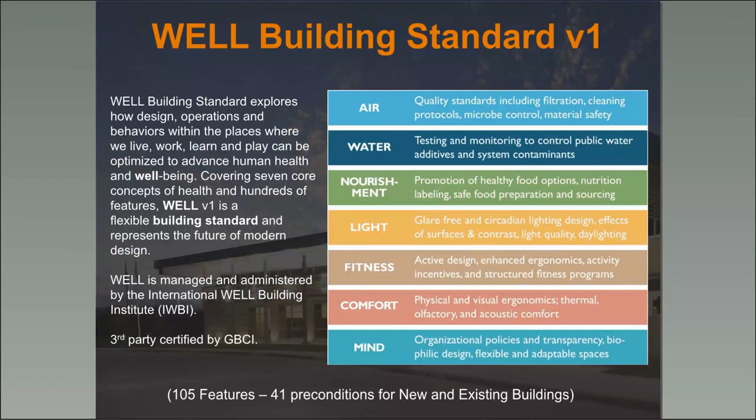The third-party survey that I talked about that we have been using is by the Center for the Built Environment. It's a University of California, Berkeley organization. They have an indoor environmental quality survey, IEQ survey, that is an industry standard. They have different surveys for different kinds of project types. So the one that we use for our study, in this case, was the one for the schools.

The interesting part is that we have been using this survey, the third-party survey, for the last 8 years, and WELL Building Standard actually defines a precondition for their standard is to use the CBE surveys for 3 years after occupancy. So they are also understanding how important it is to actually do a third-party user satisfaction survey rather than create your own surveys. So the survey categories that are included in this CBE survey are all the 10 that you see there, which all relate to human health and wellness and user satisfaction.

You can actually add 4 additional ones, which can be project specific. So we go to the facilities and we say, these are the ones that will be included, but what other 4 do you want to survey? So there have been times when people have told us, let's do low-flow toilets, let's do low-flow faucets. Someone even wanted to do sod as one of their survey categories, and we are able to include that. For us, what was also very important was to add daylight and views into our survey categories, and we paid some additional money to get that.

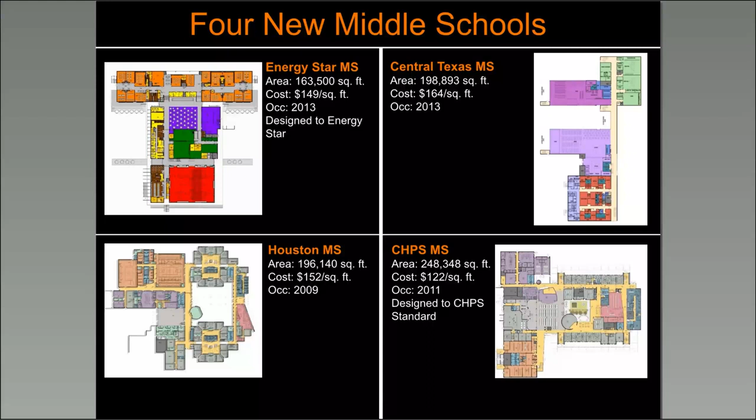These 4 middle schools are all similar in program scope, but they do differ a little bit in their square footages, from 163,000 square feet to 250,000 square feet. And they were built all the way from 2009 to 2013.

Before we get into the actual individual characteristics of the buildings we studied, we wanted to show you a little bit about how our analysis looks, and also the response rates. The Well Building Standard has a precondition of doing user surveys, with a criteria of a minimum 30% response rate. We were able to get more than that—we typically like to get more than even the one school that gave us 50%. We try to send as many reminders to the schools as possible to get higher percentages as we move through the survey process.

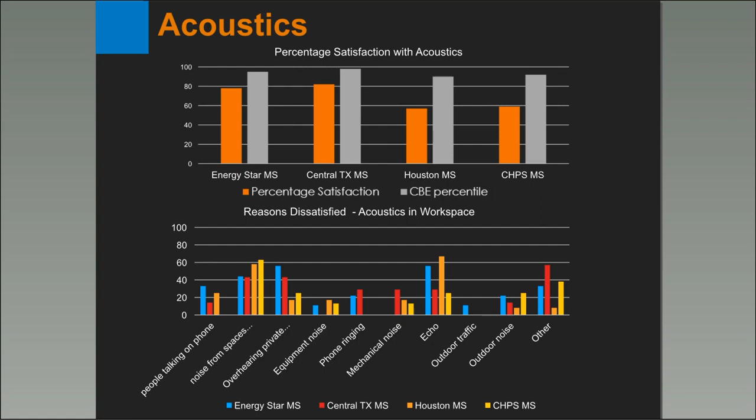Before going into the specific issues, I wanted to address 2 terms, to make sure we all have the same definition. A decibel is a unit we use to measure the intensity of a sound. That first chart graphically gives you a reference for varying decibel levels. I wanted to point out specific references for the 40 to 50 decibel range and the 80 decibel range. Moderate rain is about 40 decibels, a typical refrigerator is about 50 decibels, and the sound of a truck is about 80 decibels.

Sound transmission class, or STC, is a rating of how well a building partition attenuates sound. Things that affect how well a partition performs are its mass, its framing methods, and its air tightness. At an STC of 40, loud speech is audible through the partition but not understood. At 50, shouting is barely audible. In general, STC ratings between 40 and 50 are considered pretty good in the industry. But again, sometimes noise is subjective.

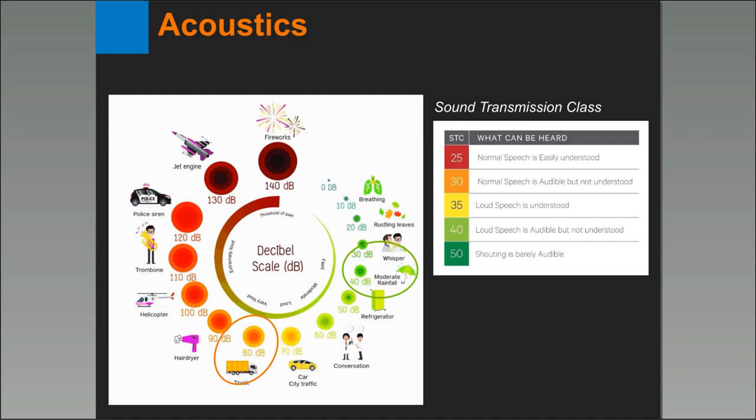So now we're going to look at the specific issues that the commenters commented on.

So one area in particular was with regards to foldable walls at classrooms. A quote from a user says, "We have foldable walls. We can often hear what's happening in the classroom next to us while teaching. And while the foldable wall helps create flexible spaces, if we can't provide adequate acoustic separation when the rooms are used separately, we really haven't given you flexibility."

And like I said before, we visited this school and took some decibel readings in a few of the classrooms. One room in particular was being used for small group instruction with our teacher, and the adjacent classroom was a full active classroom. In the small group classroom, the decibel reading through the partition was about 45 decibels. Per industry standards, anything over 40 is considered pretty good. But since one side of the wall was doing quiet work, it was still considered a distraction for some users.

So what can we do to allow this kind of flexibility for schools who want it and provide better acoustic separation for the various tasks that can happen in classrooms? Well, first we can specify higher STC rated partitions. We typically specify movable partitions with an STC rating of 54, but many times these get value engineered to a less rated wall. I think the ones at this school in particular were down at an STC 49.

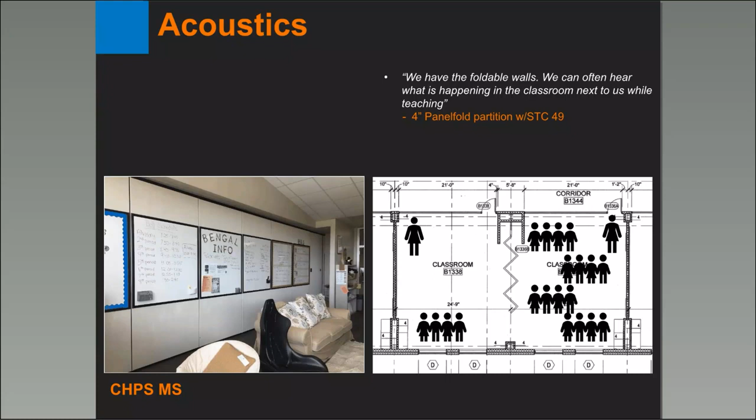So we need to make sure that everyone's in agreement that this is not one of those items we want to skimp on. Second, we need to make sure that the movable walls and the seals are maintained and that the users know how to correctly operate the walls. Because if the seals aren't employed properly, sound can leak through the cracks and reduce the effectiveness of the wall, and you'll get bleed over sound between the classrooms.

Another location identified by the users was surrounding the cafeteria. When we visited the school, we got to experience the dining space during lunchtime. We took an ambient noise reading for the cafeteria, which registered at about 80 decibels. If you remember back to the graph, that's about as loud as a truck.

So one way to address some of these issues is to provide additional separation between the quiet and instructional spaces and larger assembly spaces. But when that's not an option, providing a higher STC rated wall or even double walls, which has an airspace in it, is even better and very helpful. When you have doors that open up off of these spaces, you could also provide sound seals at those doors, or maybe even add a vestibule, which would help from that leakage from when doors are open.

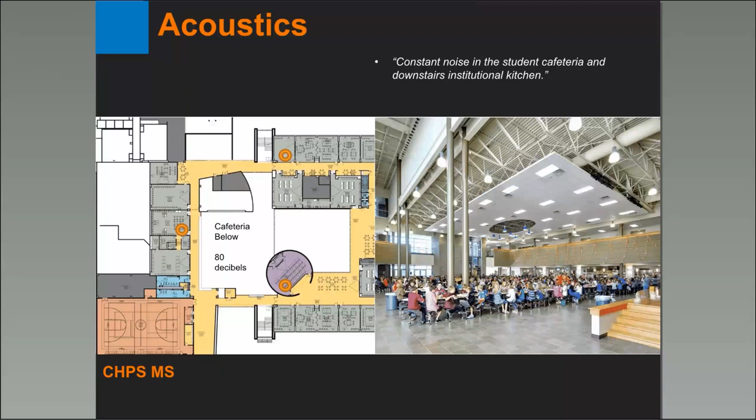So the Central Texas Middle School, they gave us quite a few comments in regard to the acoustics of their space. One quote says, "We hear the toilet flush every time someone uses it." And another one was, "We hear heels tapping down the hallways above us."

In talking with the design team, even with providing all walls to deck with sound insulation, they still experience issues such as flushing noise from the toilets. With this in mind, we really need to be reviewing adjacencies during design. If possible, it's best to locate bathrooms next to louder spaces, but when that's not really an option, you really need to provide additional sound separation to help mitigate that problem.

Again, those double walls with the airspace, and just looking at the different STC ratings and acoustical ratings of the different wall types and making sure you're picking the right one that will provide the best isolation between those two spaces.

The comment regarding the tapping and walking down the hallway is actually very informative, because we don't always think about the adjacency of spaces below or above the rooms. We're just really looking left and right, up and down, but the vertical adjacencies are very important too. The specific complaint was regarding the classroom over the library, which was underneath one of those entire wings. They could hear students moving chairs and desks, plus the tapping of heels down the long corridor, and it was distracting.

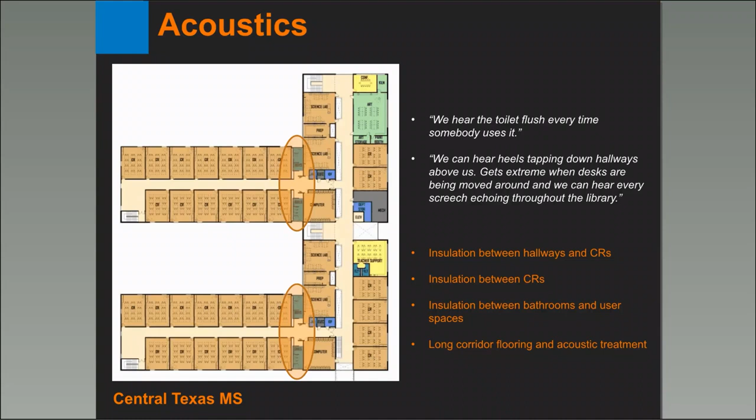So to sum up some architectural design considerations on this list: reverberation time increases background noise, so use hard surfaces and exposed structure with caution. Also consider the path of travel sound can take. All three of our examples benefit from those three considerations. If we really think about those during design, we can help mitigate some of that.

We didn't really cover mechanical noise issues, but in general, limited space for HVAC ductwork can increase air velocities and increase the noise from the ducts. And when comparing equipment noise data, you need to make sure you're comparing the same noise data from the same standards, so that you're really evaluating apples to apples.

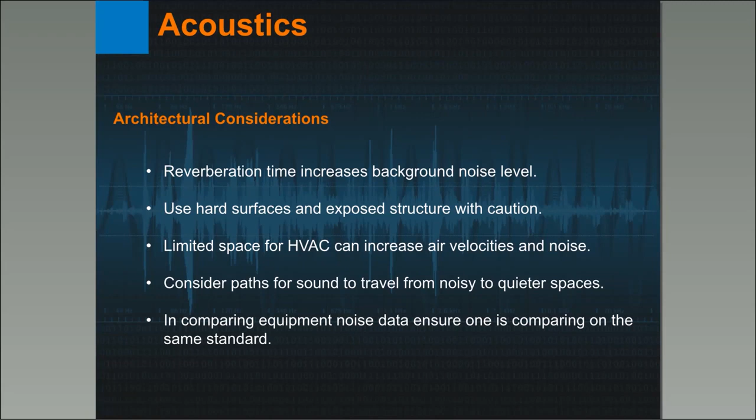Tying this back to the WELL building standard, acoustics is under the concept of comfort. The WELL building standard aims to mitigate unwanted indoor noise levels and reduce exterior noise intrusions to enhance learning, productivity, and social interaction. WELL has recognized acoustics as an important concept, and because of that it has set preconditions that must be met, such as limiting exterior noise intrusions to 50 dBA and limiting internally generated noise to a noise criteria of 35 in classrooms.

And I will turn it over to Shivani now.

Thanks, Christy. Great. So our next category that we are going to talk about is daylighting. And I know this first slide gives it away. Actually, just before I get on, I saw a question that popped up asking to please define POE, from Gloria.

Gloria, our slides 4, 5, and 6 do talk about it, and POE is post-occupancy evaluations. Sorry if the abbreviation wasn't clear, but we define post-occupancy evaluations as a quantitative and qualitative way, and that's why we're going through the qualitative aspect right now with user surveys, and we'll get to the quantitative aspect at the end of our presentation. We can probably talk about the second question, which is a bit more descriptive, at the end of the presentation, but please feel free to type in your questions as you see them.

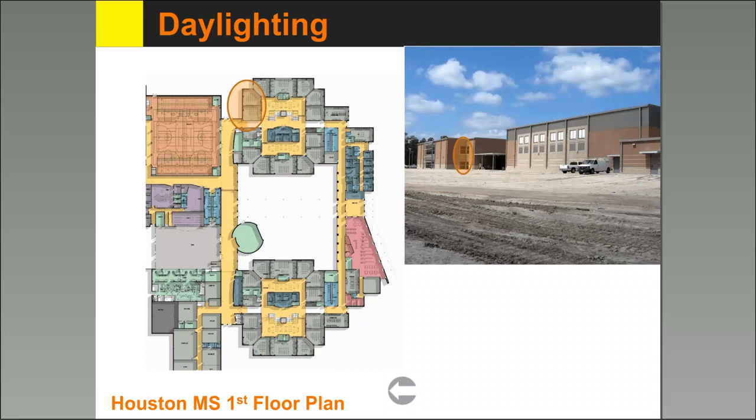So we looked at the Houston Middle School, and you can see from those images and the floor plans, the Houston Middle School, which had slightly higher user satisfaction than the CHPS Middle School, had those 2 punched windows at the corner of the classroom, and that was pretty typical in this school.

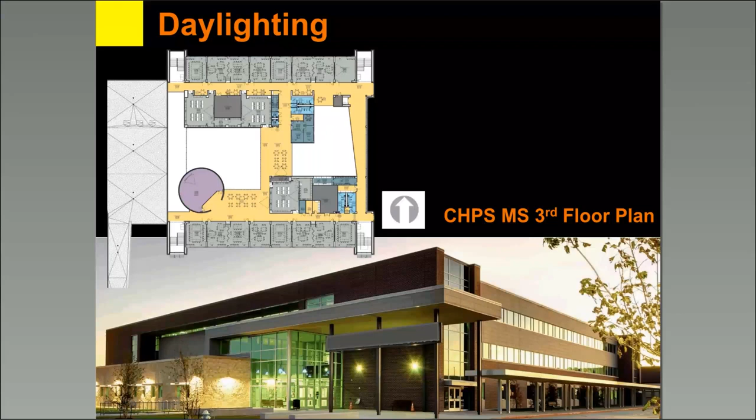But if you looked at our CHPS Middle School, this is truly one of our flagship schools, and it has wall-to-wall glazing. You are seeing the north side glazing right now, which is, those right side of the entrance is all classrooms, and they are wall-to-wall glazing on the second and third floor classrooms.

And then when we looked at the south side, it was really well-designed daylight harvesting system. You had light shelves, sunshades. There were sloping ceilings to get the daylight all the way in. But we did, again, get the comments about the glare being too harsh on the projection surfaces.

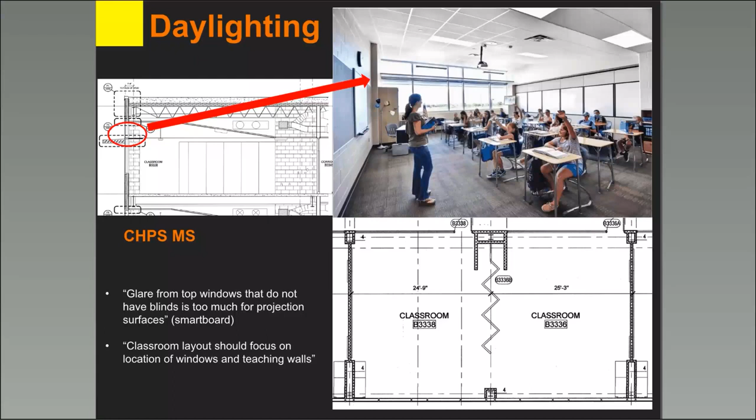So we remembered that and then we went actually and studied this building live. So we actually went and looked at it, just like Christy mentioned. This was one of the buildings that we went down and saw what was going on. And what was very disturbing for us was that they had gone back and added the blinds on top of the light shelves in the clerestory windows.

These blinds are completely inaccessible, so they're always down and always closed. But even then, you can see that the smart board was actually not visible to someone from this side of the room.

We also remembered that when we had done the elementary school studies, there was something similar that we had noticed. There was an old prototype school design which had 2 punched windows on one side of the classroom, but then a very well daylight harvested classroom, as you see on the new design pictures at the bottom.

But when we did our survey analysis, we saw that really the old prototype design actually had higher user satisfaction, as you see in that orange, as compared to the new design. And the new design actually did not do very well in the CBE average database as well. We were pretty low in that CBE average.

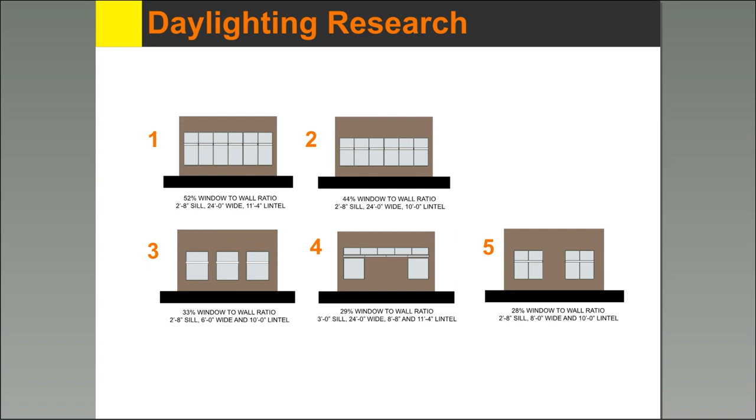that we see in classrooms to understand and ask ourselves the question, how does glazing size or configuration, sunshades or light shelves, and orientation of fenestration affect daylight quality and user comfort, heat gain and thermal comfort, and construction costs?

Daylight can no longer be just listed as the quantity of daylight. It is the daylight quality that we are looking at, and this research is just completed, and we got to learn a lot from it. But understanding that this research would have never come about if we hadn't done the POEs and seen what our users really want.

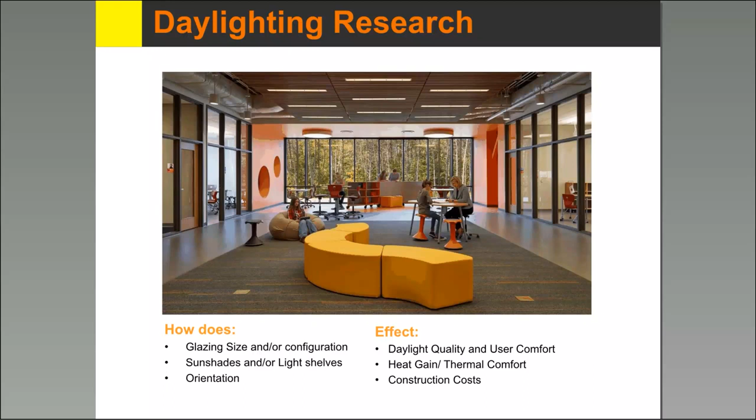But coming back to why we are seeing this difference too right now, and why we used to do daylight harvested buildings previously, is because lighting codes have changed. In previous years, daylight harvesting gave us back much higher returns because energy codes were not that stringent.

Now with IECC, almost all our buildings are 100% LED lighting, where the payback is not as high for daylight harvested classrooms. Projection technology definitely needs to be specified for the amount of bright light in the classrooms, and that can get quite expensive. In both those schools that you looked at, the technology that would have worked better with bright light was value engineered. So that's a tough thing.

Like Christy said, I think with value engineering, we have to remember the decisions we cannot skimp on. And then it's very important to have the right training. People that did not understand how the daylight sensors worked were indeed more dissatisfied because they thought the switches were just not functioning. And also, we got some comments back about motion sensors not functioning.

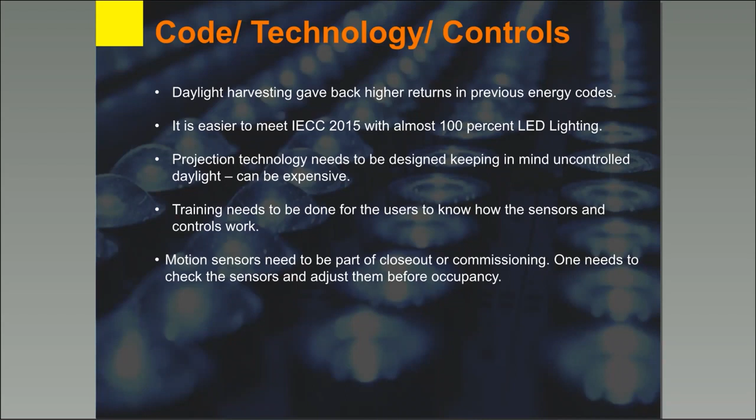And I think it's very important for us to have commissioning requirements and making sure that everything is functioning when it comes to these kind of sensors in order to get higher user satisfaction at the time we give our clients the completed project.

So tying daylighting back to WELL, it actually absolutely defines or understands that there is something that we have to also look at. I really like the quote right there: there are two kinds of light, the glow that illuminates and the glare that obscures. And in this case, that's literal. Even LEED version 4 has actually really addressed glare to a very large extent.

And the preconditions that WELL has defined, because of how important daylight quality is to user comfort and health, talk about visual acuity, which is all about visual balance. And then it talks about solar glare control and electric glare control. And we have to meet those preconditions to be WELL certified. I will hand over back to Christy to talk about our next analysis.

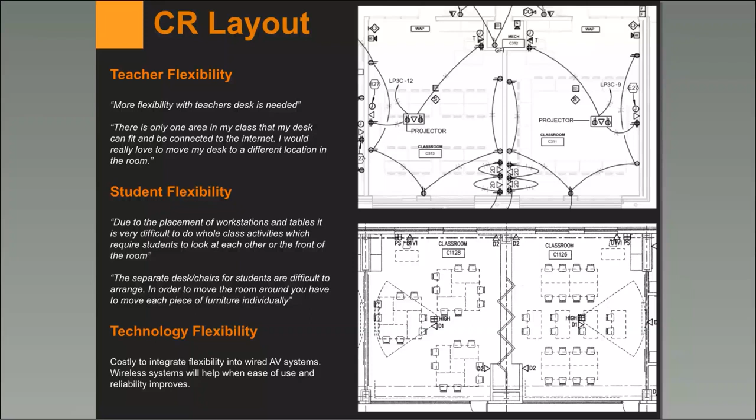Space and furniture flexibility are only part of the equation. There's also the technology flexibility that needs to be considered. And like I said earlier, new technology is being developed all the time. The ultimate goal is to provide as much flexibility in the underlying infrastructure to make it easier to implement future tech as it becomes available to the schools. And by providing the flexibility that's wanted by the users in terms of technology, space, flexibility of furniture, we're ensuring a higher user comfort.

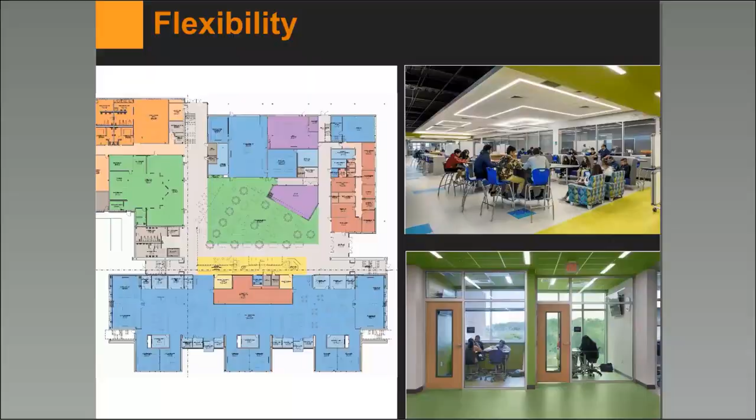So the WELL Building Standard has identified that healthy work and learning environments should be designed to mitigate stress and optimize productivity, and should therefore be sufficiently adaptable to working, focusing, and collaborating as needed. So there need to be spaces available for all types of work, so each person can adjust their environment and choose their level of engagement based on their activity. So flexibility in design can help facilitate this need, which can increase satisfaction for both teachers and students. There are no preconditions for this category, but you can qualify for optimization points by having different types of spaces available to the users.

So this says, the cold never bothered me anyway, but honestly, I'm cold all the time. I actually use a heater in the summer. So obviously, thermal comfort is another one of those subjective issues. Two people in the same room can have vastly different experiences based on their personal preferences.

So from this graph, you can see how difficult it can be to get a high satisfaction rate. For the most part, it's hard to get 60% or more user satisfaction when it comes to thermal comfort. One user's comment was, we share heat and AC with another room. It's not always comfortable in each room.

And a lot of the decisions around thermal comfort aren't totally under our design control. For budget reasons, most schools don't allow for individual classroom control. Sometimes they're grouped like two classrooms together, like in that comment she just made. But then there's also the amount of control allowed by the system, because most districts decide on the set point, and the thermostats only allow adjustability within a few degrees of that set point.

Sometimes the culprit for dissatisfaction can be the scheduling of the systems. They may be assuming that after school hours, the units don't need to be run, but some after-school activities might be taking place, which needs the systems to continue running. And when we share this information back to the district, it helps them start a conversation on how they might adjust the scheduling of their systems or the set points to help mitigate some of the issues and the discomfort for the users.

One example of how we were able to pinpoint a specific issue we wouldn't have been aware of was the comment regarding the science room, because in discussions with the design team, we found out that the fume hoods were not specified with dampers, so cold air was leaking back into the room, making them uncomfortable. So with this knowledge, we can make sure that all the future vent hoods are specified correctly.

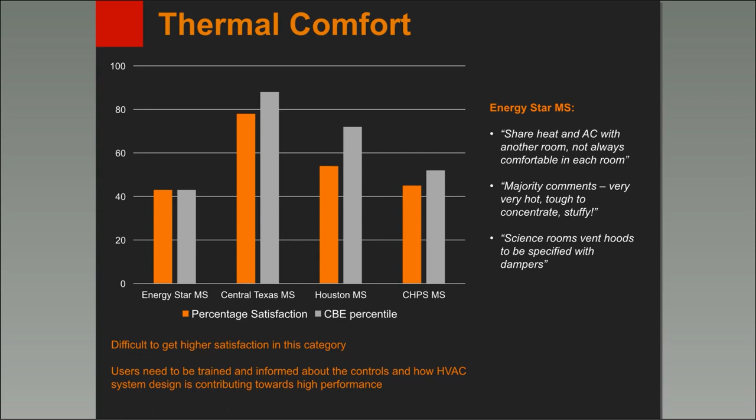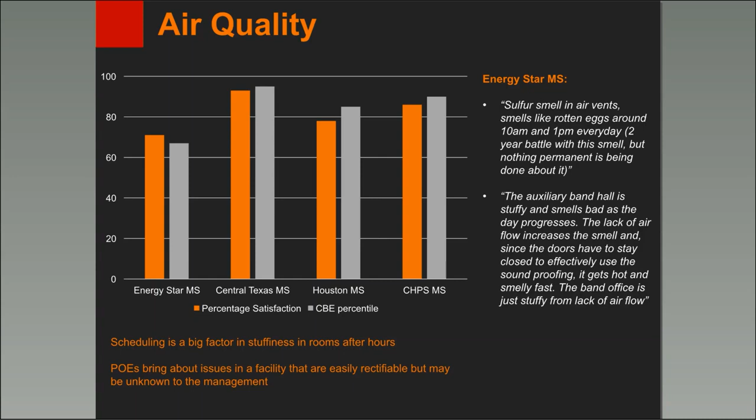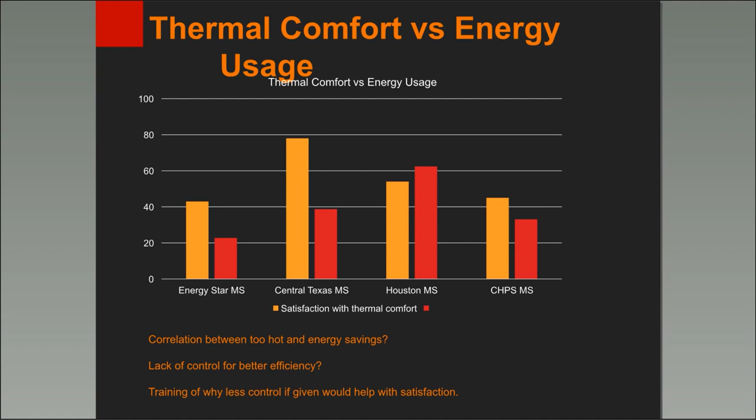So there needs to be a balance between the two issues, and there needs to be an understanding of why, perhaps additional training given to the staff for a better understanding of why they've got things set as they are, and how discussion back and forth between the users and the district can help mitigate those issues. So energy efficient buildings are only as effective when the occupants of the building are comfortable. If they're not comfortable, then they're going to take alternate means to heat or cool their space, such as I do with my heater in the summer.

So preconditions to meet WELL for thermal comfort include providing all spaces to meet ASHRAE 55 requirements for thermal comfort, and ASHRAE 55 addresses various combinations of indoor thermal environmental factors as well as personal factors, aimed to produce thermal environment conditions acceptable to the majority of its occupants. So again, they're trying to meet what's comfortable for the majority of the people, so there's always going to be someone who's probably not that happy.

But an optimization is available when providing a 5-degree variation and 50% free address in open offices, meaning you provide spaces that have 5-degree temperature variation, and people have the opportunity to move their personal workspace to the area in which they feel more comfortable.

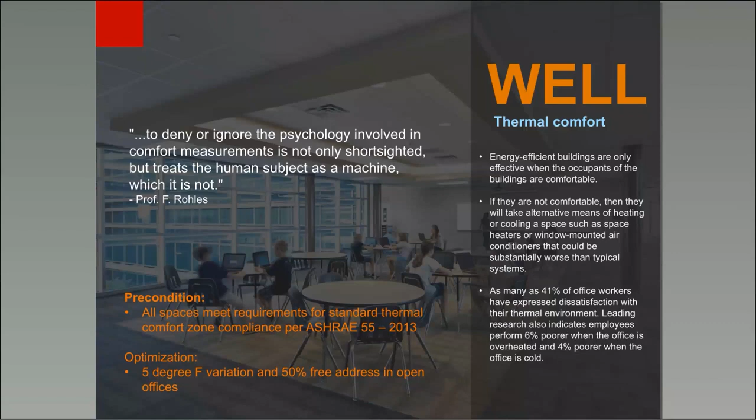And I'll turn it back to Shivani. Thank you, Christy.

I know there's a lot of data on this slide, but we wanted to see how our buildings were performing and relate them to each other as well, and that's why you see so much on the slide. The HVAC costs per square foot have been converted to 2013 dollars because of the cost of construction, and these projects were built between 2009 and 2013.

On the left, you see that when we did have predicted energy usage, so we did perform energy modeling for the Central Texas School and the CHPS Middle School, that's why those numbers are in there. But when we did not have the predicted energy usage, we are using the CBECS 2003 data, which is the Commercial Buildings Energy Consumption Survey, which is nationwide, and the 2003 data is what the 2030 Commitment uses,

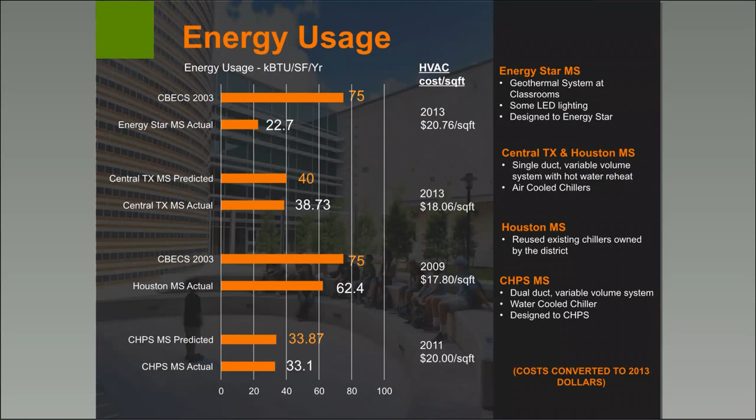And then when we dug deep, we realized that this was the project where our clients wanted to use existing chillers that were owned by the district. And this is what caused that project's energy usage to be that high, even though the Central Texas and the Houston Middle School had exactly the same HVAC system, as listed on the right side. They were both single duct variable volume systems and air-cooled chillers. The Energy Star one was all geothermal, and that was one of the reasons why it has very low energy usage.

Every year, the Center for the Built Environment looks at all the surveys that the industry is performing. So when we use the CBE's database, they actually put our schools in and look at them in relation to the other schools. In 2016, 3 of our schools that we studied were finalists for the Center for the Built Environment's Livable Buildings Award. This award is given for highest user satisfaction and the lowest energy usage of buildings studied during that year. And the Energy Star Middle School actually won the award because it had very high user satisfaction, but also performed 70% better than an average school when it came to energy usage.